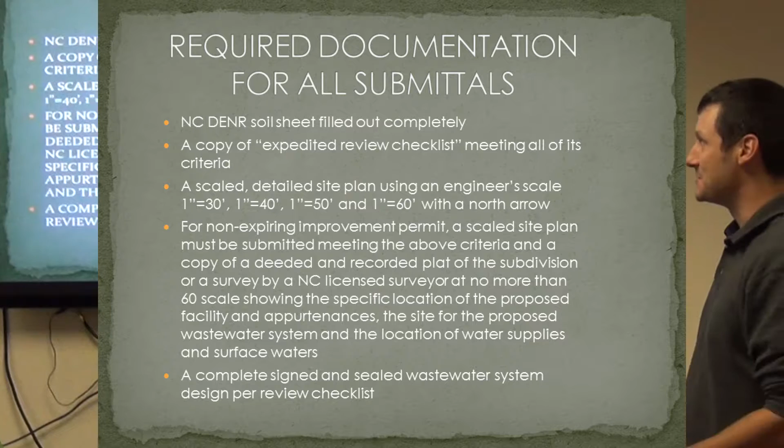We would like the NC DENR soil sheet filled out completely, also called the DHHS soil sheet. I'm sure it'll change again at some point in time, but for right now it's just been updated online. It was still called the DENR soil sheet, but they updated it to DHHS soil sheet, and if anybody has a question what that looks like, there it is. It actually does say Department of Health and Human Services. After 2 years of being that, 3 years being that, they finally changed it. I think they changed it after we got this all approved, so in our stuff it still says DENR.

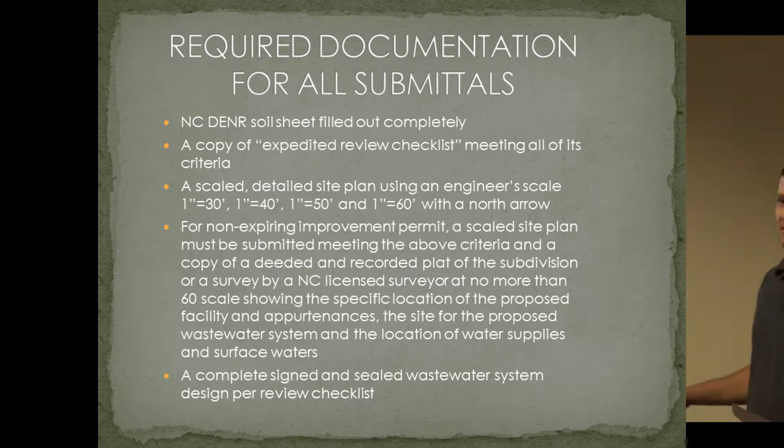That's just to keep consistency. I know everybody likes their own soil sheets with their own logo on it, and that's great, but every time we get one we have to go find each column, figure out what it has, and go through it. So if it's consistent, we know boom, boom, boom, easy to hit it and keep going.

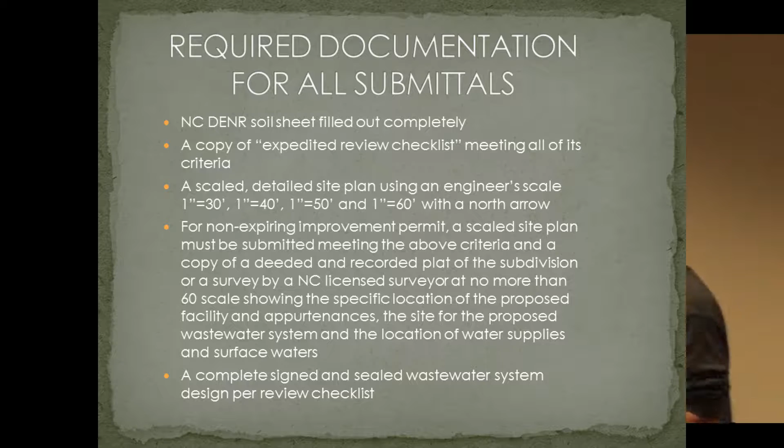Copy of the expedited review checklist, I have that here too, it's also in your packet there. This is the expedited review checklist. For many of you that have done this for a while, it looks very similar to a checklist from 2005, because it is, minus a couple changes, some more detail has been added to it. There was some vagueness to it, and I'm sure if you read it enough you'll find some gray area also.

It's like with the septic rules themselves, there's gray spots. But the goal with this was to give an idea of what we were looking for, and it lays everything out, so you can check, go through it, make sure it's all there. Most everyone does this anyway, so there's not a whole lot of change between what used to be and what is now.

We would like to be to scale. Again, most everyone does this. Scale, detailed site plan scale to engineer scale of 1 inch equals 30, 1 inch equals 40, 1 inch equals 50, or 1 inch equals 60. With a north arrow, again, this is very typical.

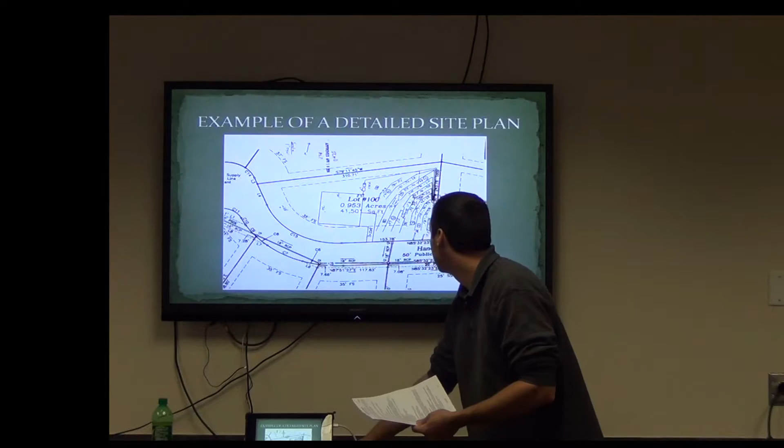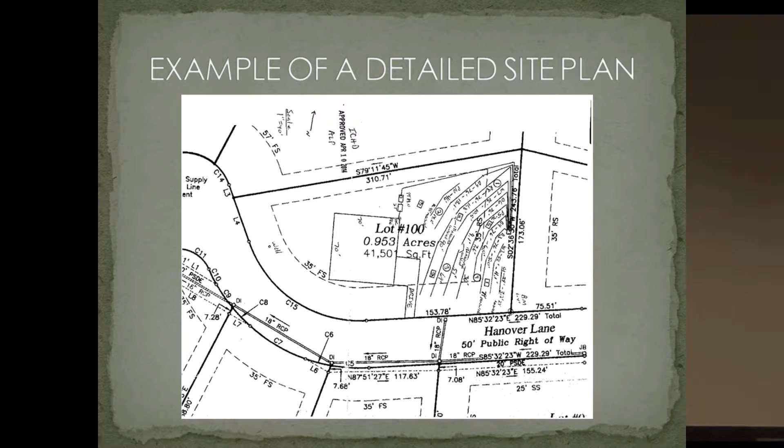I do try to put as many examples on here as I know were previously required. That is a site plan there, with a north arrow and scale. But it shows the detail on there of the site plan.

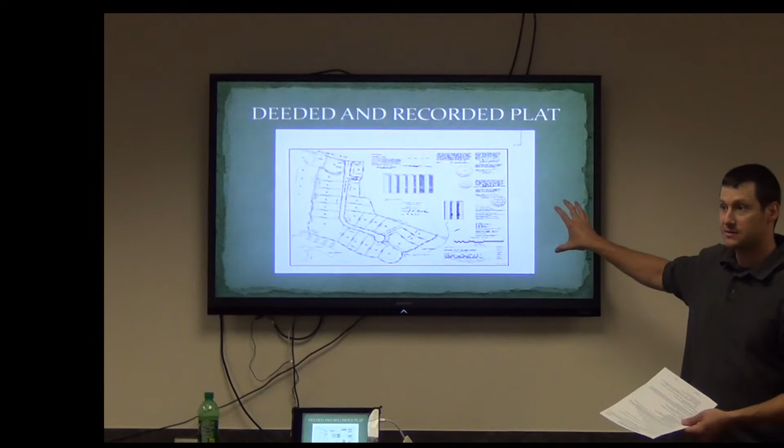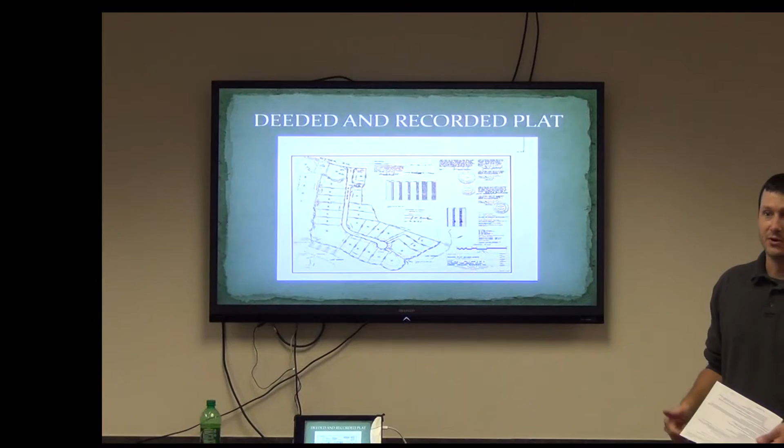This is only for non-expiring permits. This is a deeded and recorded plat of the subdivision. So for non-expiring, this would suffice as the requirement of a deeded and recorded plat. It would actually say on here, one of these stamps describes the plat date, when it was recorded, year and all that.

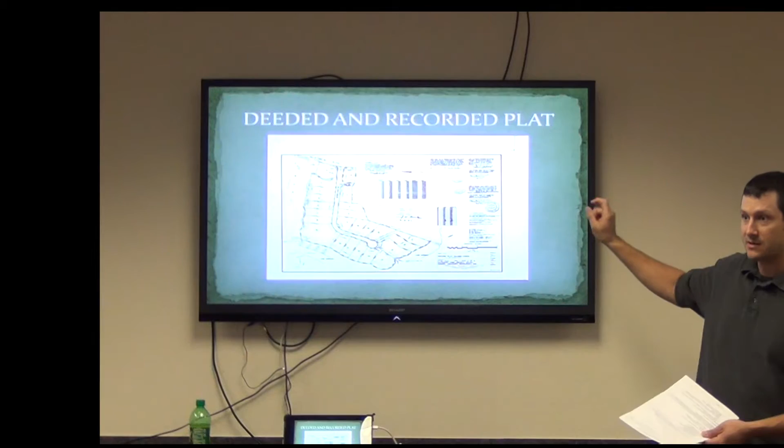They have changed that a little bit. Now it's actually a barcode stamped on it, and it says this plat was recorded at this date, but it still has a recordation date on it. It's not necessarily the plat date, but the recordation date.

Are you saying seal every page or just the cover sheet? Just the middle, as long as it's on there somewhere. As long as it's been sealed, it's got your seal on it.

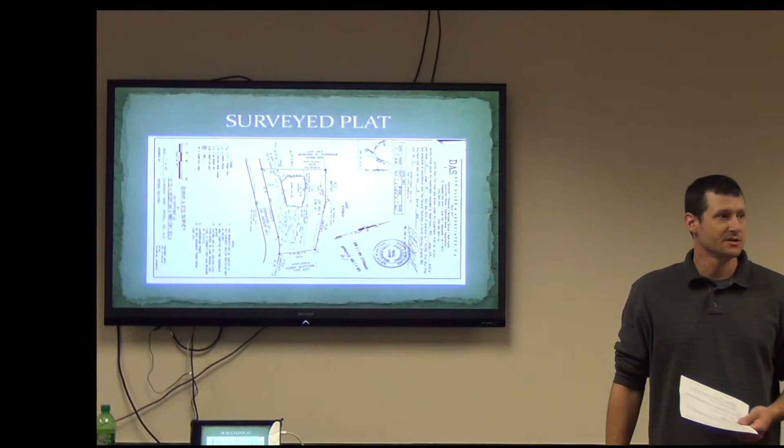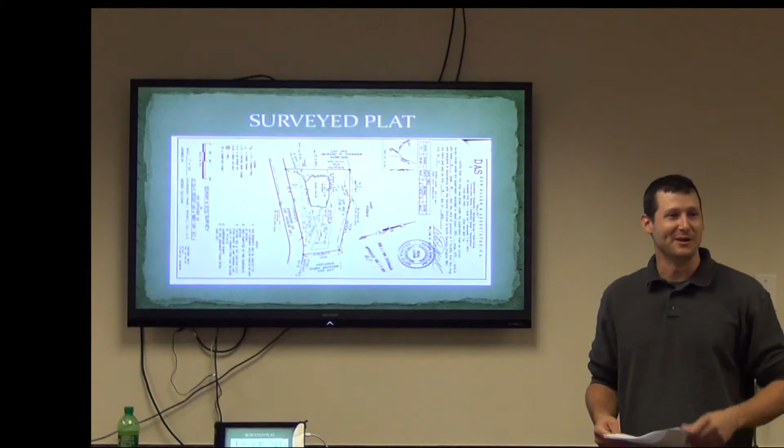Would you like to seal every sheet? No, because I like a lot of clutter where you can't really find the pertinent details. Yeah, I agree. Maybe eight seals per page, that's fine with me, I like confusion, so we could do that. Use something bright too that sticks out, or use black ink for your site plan too, so it all overlaps. I don't care, as long as you sign it and seal it somewhere, on cover, notes, whatever.

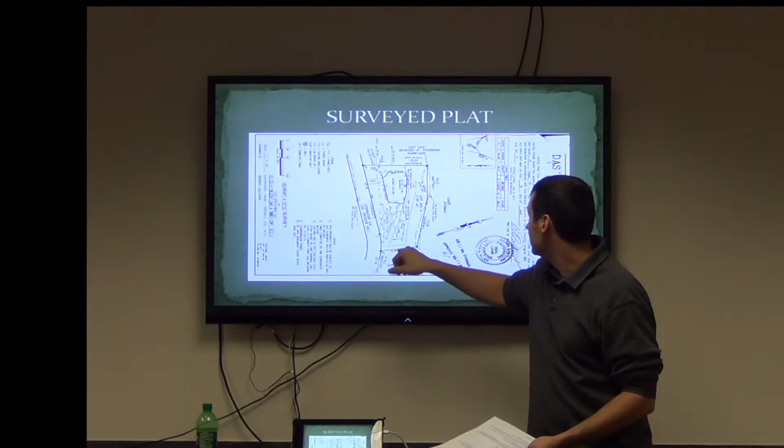This is an example of an actually surveyed lot here. Obviously it's sealed by the surveyor. It shows everything located. If there were any surface waters here, there it is, Lake Norman, there's your surface water, there's your well. It shows the location of all the septic lines, septic tank, house pad area. It's sealed by the surveyor, so that satisfies that part of the non-expiring requirement.

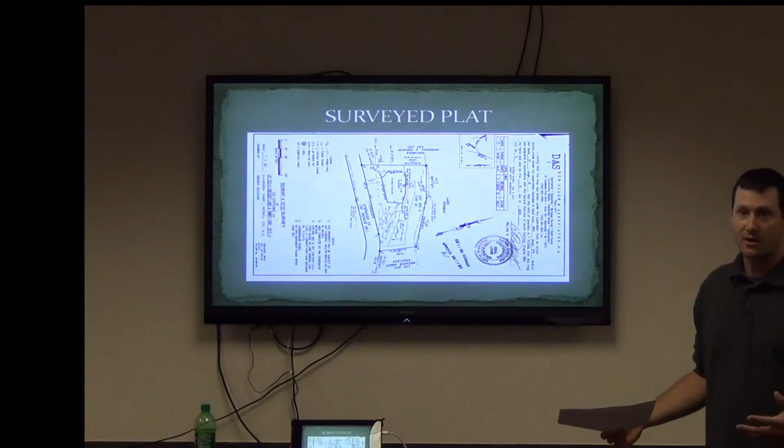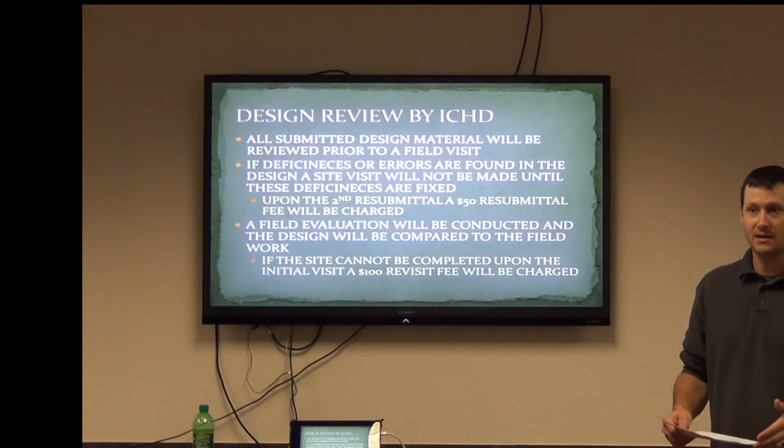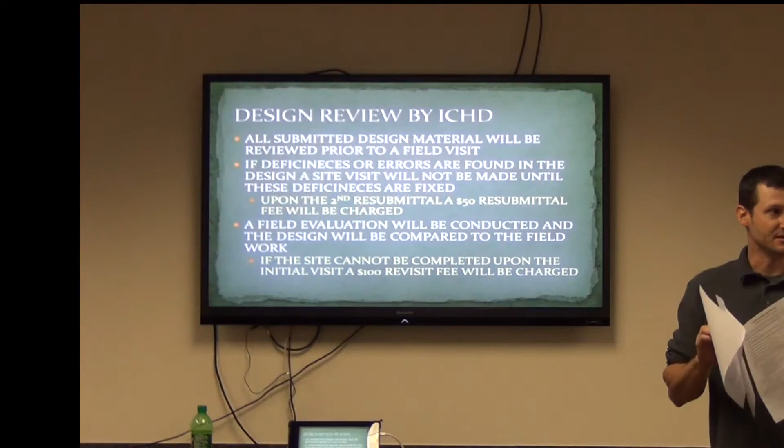All right, design review. That comes down to our job in the process. So we've kind of covered what you guys are gonna have to do, mainly in the expedited review process and the checklist. That's really what you guys are gonna be spending most of your time on, just making sure that it's all there. The rest comes down to what we do.

All submitted design material will be reviewed prior to a field visit. Sometimes we do that. I know in Mooresville, it's generally opposite, you kind of review it while you're in the field. I know in Statesville, they review it prior to going to the field. Well, it's all going to be prior to going to the field now.

So we're actually going to sit down, review this thing, make sure that the math adds up, make sure it's got all the stuff off the checklist on it. And then if we don't, we'll let you know. But we're going to do all that in advance before going to the field, and that way by the time we get to the field, we're just checking for soils, line lengths, the layout, making sure everything matches there.

If any deficiencies or errors are found in the design, a site visit will not be made until these deficiencies are fixed. That's something new. Before, we kind of said, all right, we've got some issues with it, but we'll still go to the field and evaluate it. We've now determined that what we'll do is find any deficiencies, set it aside, go to the next one, and notify you that we've got issues with this design.

Upon the second resubmittal, a $50 resubmittal fee will be charged. That's a new fee.

As part of us having to keep reviewing, if we have issues to the point where we really have your third submittal - because you submit once initially, we find errors, you submit it back to us. If we still have errors, you submit it a third time, and that would really be your second resubmittal fee, because you resubmitted it twice. Is that confusing enough for you?

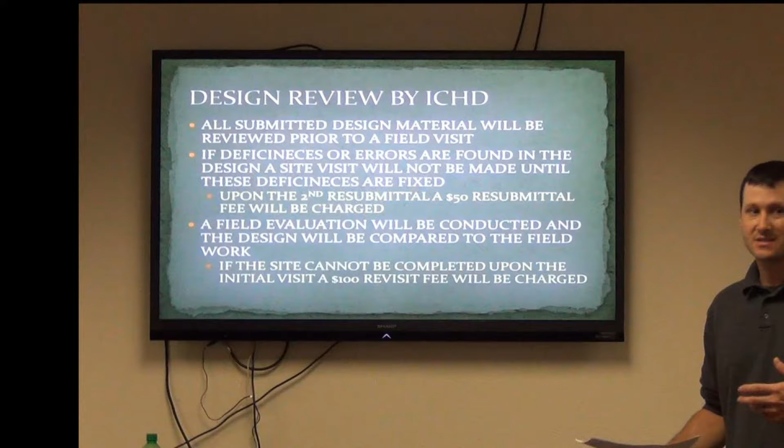We get out there, nothing's marked, we leave. We call them back and say, we talked to you, you said everything was marked, what happened? Oh, I thought you just needed the front corners marked. No - well then, the same fee occurs there too. So this is not trying to pick on anybody. We pick on everybody evenly. We are equal opportunity picking people.

So this is a description of the submittals after the initial submittal - again, it's in your package. You have your first resubmittal, we're going to call these errors. Errors shall be corrected and a new application resubmitted. We will request a new application to be resubmitted with the owner and client's signature.

The reason for that is to hold some accountability too. Whenever we request something to be resubmitted, this is where sometimes there's not conveyance between us, the consultant, and the owner, to where we need them calling us on the phone saying, hey, what's going on, this is not fast - this is not fast track, it should be done by now. How many times have I heard that? And we can say, well, we're on our third resubmittal here, or second resubmittal. That's why. This is what's going on.

Yes, Steve? Can the owner and client's signature be a legal representative of that company?

Well, we have forms for that too. I have a lot of papers to be filled out, like with True Homes, for example, and they have a legal representative that can sign all my documents. Is that sufficient?

We have a form also that allows legal representatives. I'm sure you've seen that form. If I get that filled out, is that okay? For a situation like that, I would say yes. Because finally, the owner may be a board.